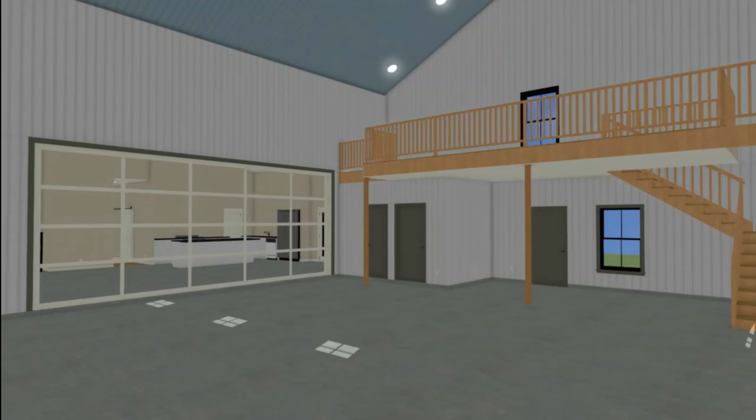I just want to go over with you a couple of types of basement walls. There's some precast basement wall systems. I believe it's called Superior Wall. That's really awesome, but it's mainly designed for traditional residential stick frame homes. So I'm not really sure they would work well for a metal building home or even a pole barn home. But here's a couple of options.

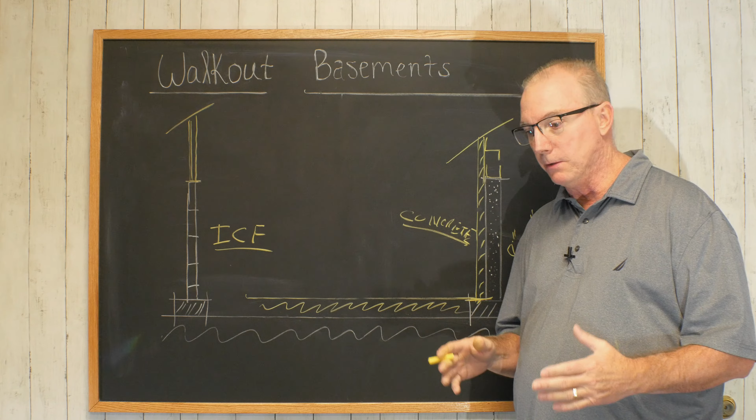You have your traditional concrete, poured in place concrete wall. That's really where they just stand forms up. They pour a footing down here, continuous footing around the perimeter. They do an 8 to 12 inch concrete wall here. And if you're going to do a rigid frame building, in other words, an I-beam building, the way I would do it is I would just disregard the basement wall as a load-bearing component of the building and just use it strictly to basically create the basement room.

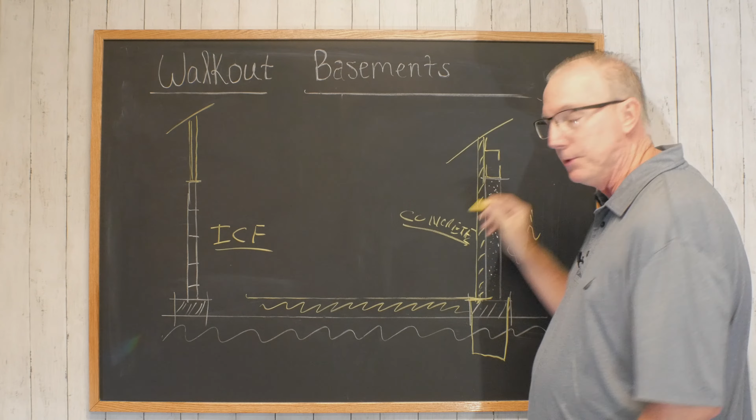And then what I would do is I would set the steel column all the way down on its own footing and pier, and actually this pier would probably be pretty large. And so this column would sit all the way down here. That would allow you to tie the other side together for that spread action we talked about. And then I would do what's called bypass wall girts, which is where you put the wall girts, the steel purlins, on the outside of the steel. Normally we put it in line with the steel, but in this situation I'd put it outside and set it right on top of the wall.

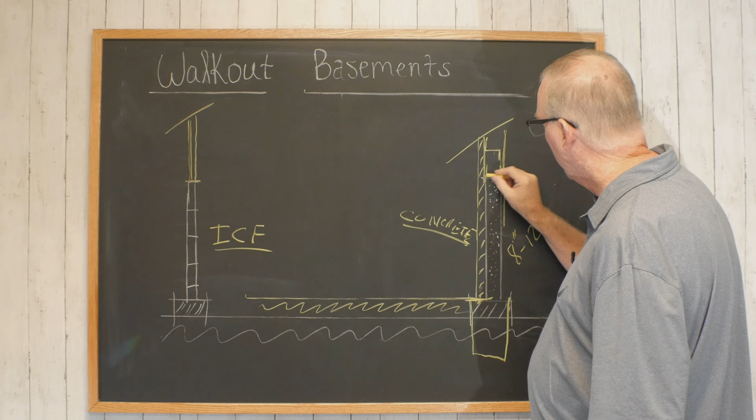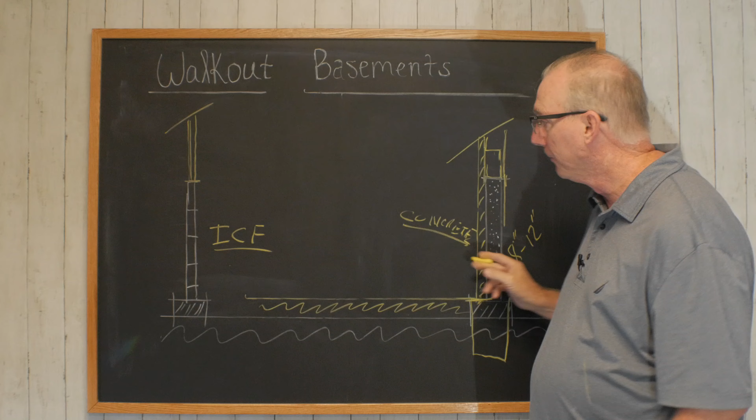So here's your sheeting way out here that's flush now with your wall system. Okay, you got your wall girts bolted to your steel here, and then you're going on up. And that way, if you can get by with an 8-inch concrete wall, then your 8-inch purlin fits perfect. And then you got your sheeting lips down a little bit past your perimeter wall. I think you're good. That's the way I would do it, okay? Or if it's a typical, like a Worldwide Steel building where they use a 6x6 steel tube column, it could bolt right down on top of that wall, no problem.

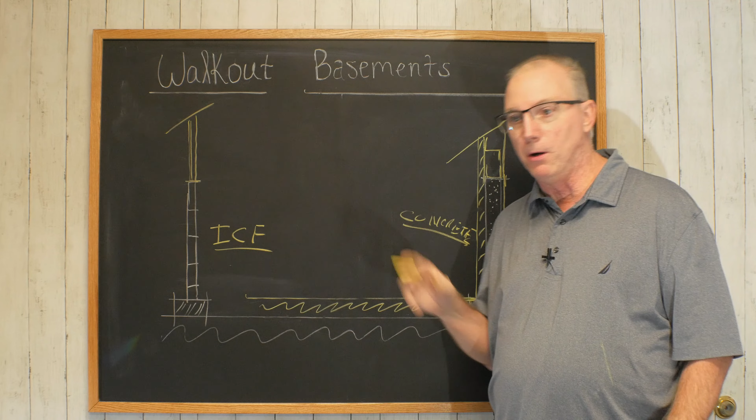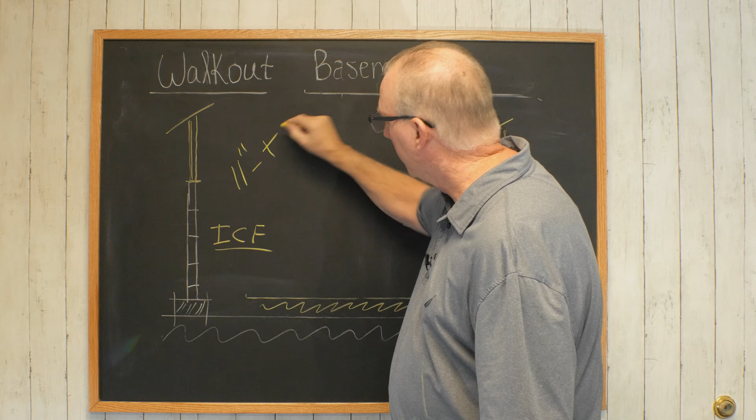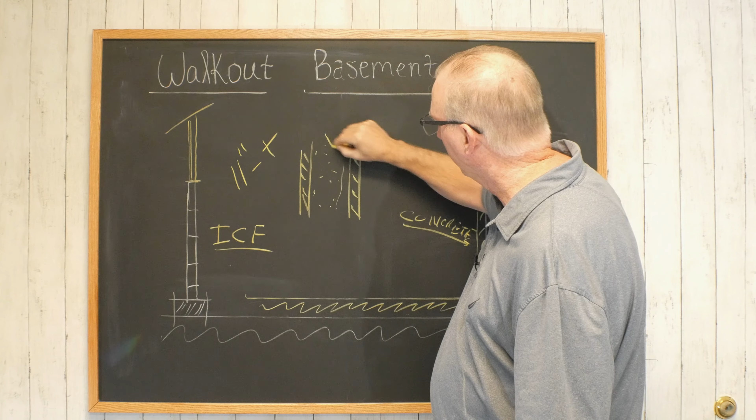Here's another one. It's my favorite personally, ICF, Insulated Concrete Form. And they come anywhere from 11 plus inches thick. Okay, so you have 2 inches of foam here, or 2.5, I believe it is. And then you got your concrete cavity in here, which is 6 inches. So I think it's an 11-inch block from here to here. And so I love these. They have a very high R value rating. They're super easy to install.

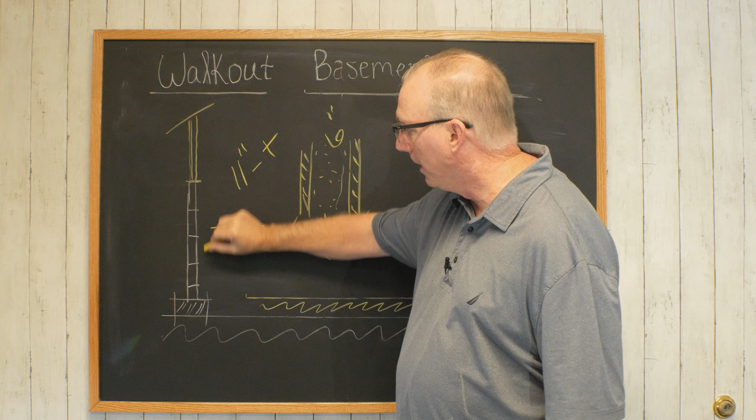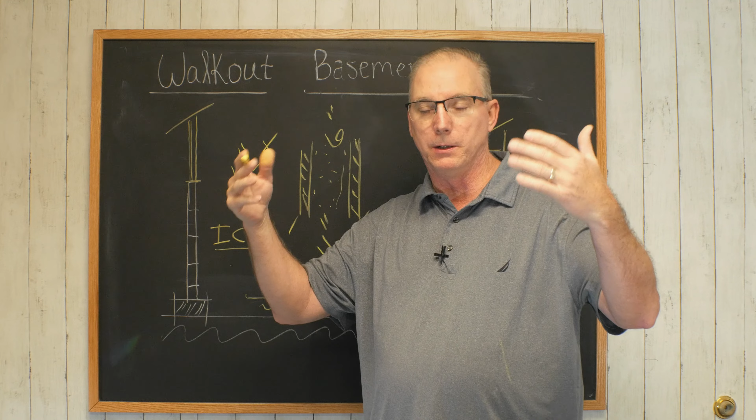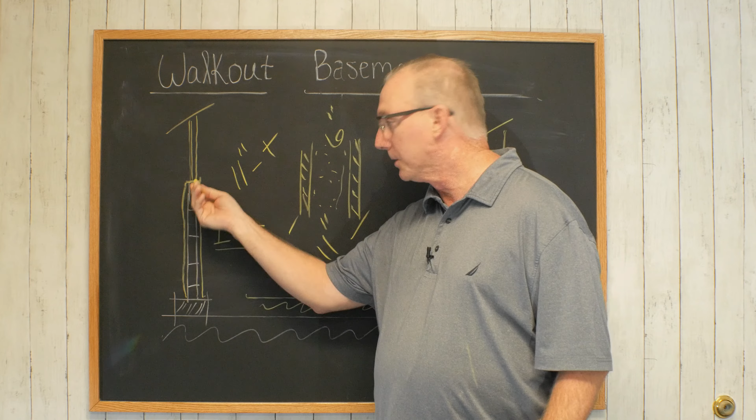You still have to form them up and support them before they're poured. A lot of people, if it's a 9 or 10 foot wall, they'll just go halfway up, pour that, let that sit, come back the next day, keep going with their forms, and pour the second pour. So they do it in 2 sections. But I like the insulated concrete form. To me, it just makes a much better wall. You get this, I think it's R30 plus. It's amazing. You get a 6-inch wall cavity.

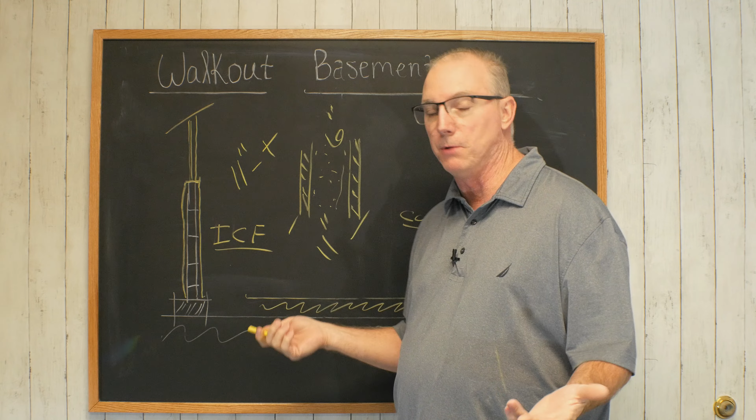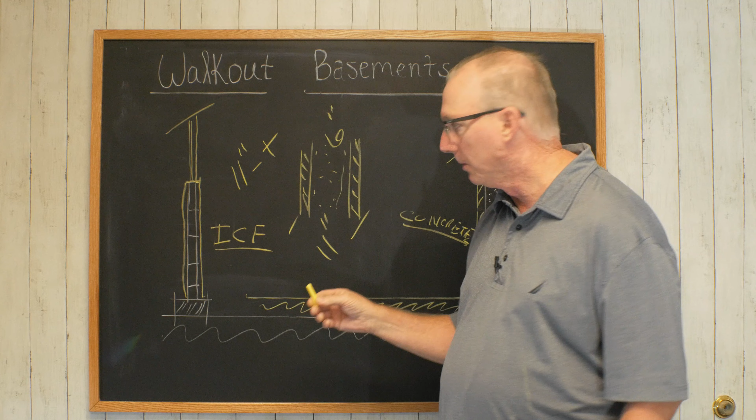You can do an 8-inch. It just depends on what the structural engineer feels is needed for the building. But in most situations, a 6-inch wall would probably work fine. And especially if it's a pole barn, I'm pretty sure with the Worldwide Steel building it'd work fine. But it just depends on what the engineer would say. So ICF, great system, or your traditional poured in place concrete system.

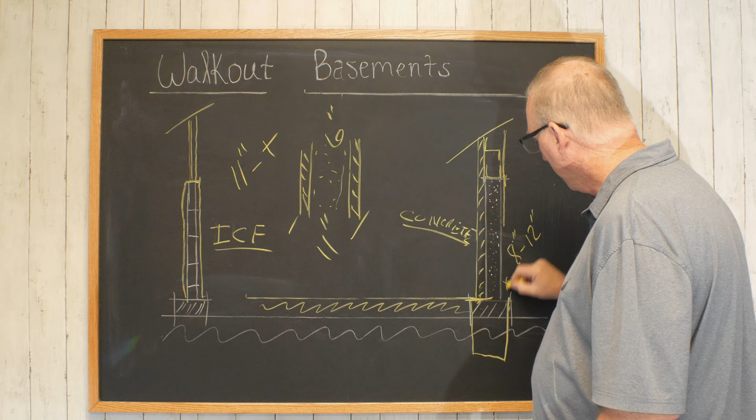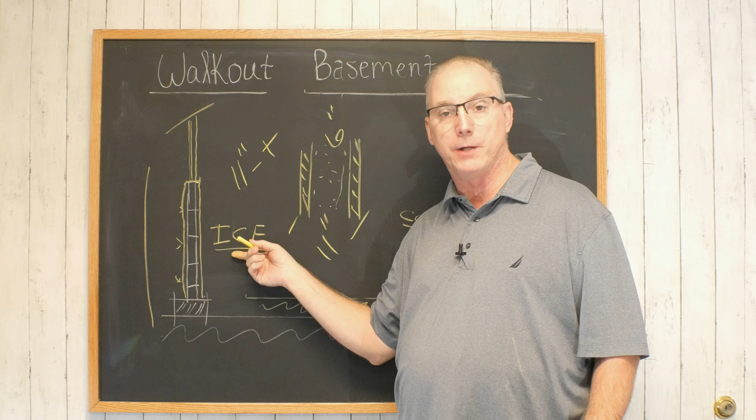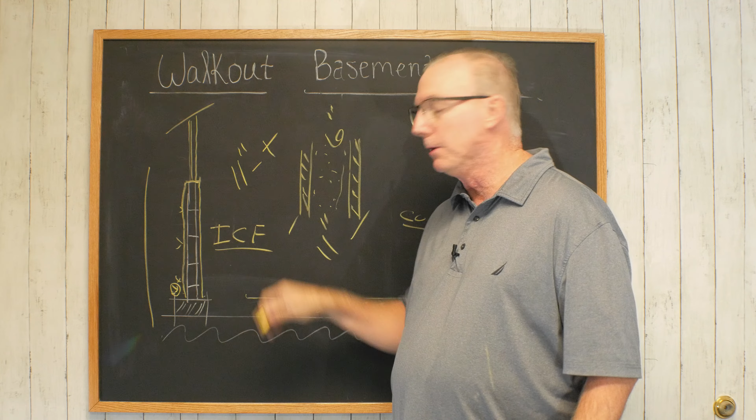Now, you still have to waterproof the outside of these, where the ground is out here. Most of the ICF manufacturers have their own waterproofing system that you can purchase, because you may have to put a French drain in here that's going to drain your water away from your foundation. So whoever you buy from, there's like Build Block, there's a lot of manufacturers for ICF blocks, they'll have a whole system you can purchase to waterproof that wall.

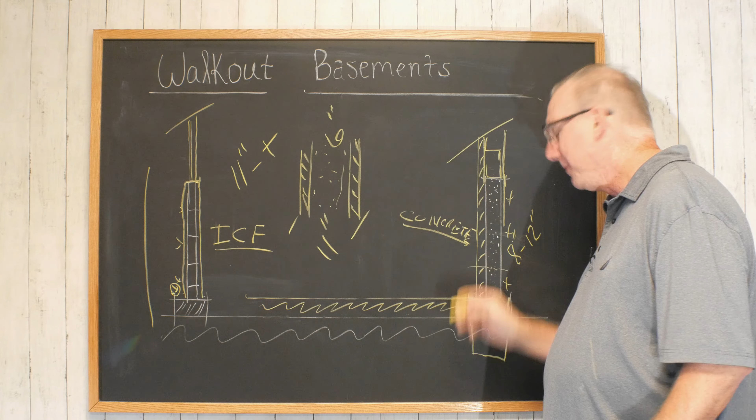And you still have to waterproof your concrete wall, because contrary to popular belief, concrete is not waterproof. Water will make its way through there. It may take a while, but it will. And plus, it'll sweat. So it's one thing to think about. So anyway, can you put your barndominium on a basement? Absolutely you can.